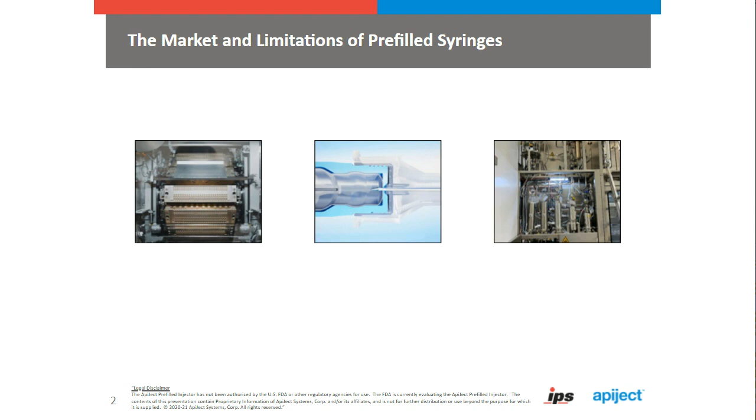So we're going to speak a little bit about the limitations of the prefilled syringe market and a little bit about the current prefilled syringe market. Currently, the prefilled syringe market is used for a wide range of injectable products. It's best known in the industry for higher value products such as biologics or chronic disease drugs that are used with auto-injectors. There are barriers to entering into the prefilled syringe market. It's really around the economics and also understanding the compatibility of components.

When you look at prefilled syringes, the development is costly. You really have to focus on whether or not the siliconization within the PFS actually works with the drug substance and do some compatibility testing. There's also glide force issues and other issues that really partners look at when they go through prefilled syringe manufacturing.

And the supply chain is very complex with having to keep syringes on hand and also having to keep other components available. And then what ends up is a relatively low output for what you're putting into the line. This is why, for us, BFS is so important, really from that unit cost and being able to get into other areas of manufacturing, such as generics or vaccines.

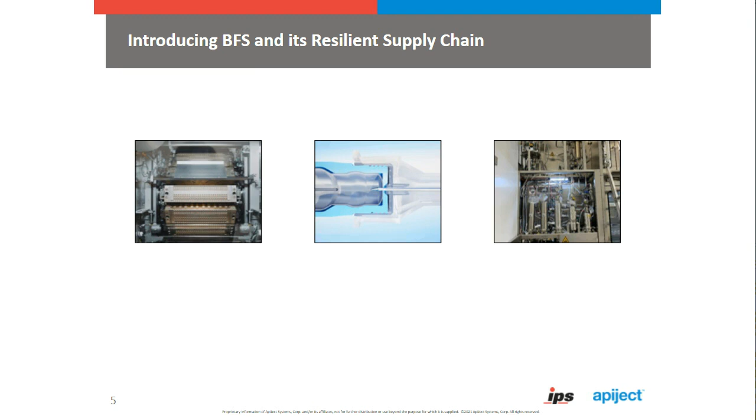So our product offering is really around working with products that don't have the ability to currently enter a unit dose market except for a vial, and really focus on getting BFS PFS out into the marketplace. Ray, would you mind talking a little bit about the supply chain and the resiliency of supply chain for us?

Yeah, absolutely. BFS is an advanced aseptic filling process. That's not made up. That's as indicated under the USP guidelines. And the reasons for that is it's an automated process, it's really a contained process. And so the filling operations happen inside of the machine itself. There's no opportunity for operator interface. It's actually physically impossible for an operator to get into the space.

There is no glass or stoppers, and so there is no opportunity for generation of particulate from those two elements. But the process itself is continuous, and so the containers and the filling and the closing of the entire container closure system happens inside the fill zone in a short 3-second period. The fill zone itself is an ISO 5 environment, so very similar to inside of an isolator in a grade A process.

And then the footprint itself is really small. To give you a perspective, the footprint inside of a normal fill suite for BFS is in the 50 square meter range, and even that's probably generous. There is a gray space on the backside, another 50. So you could put an entire filling module in for roughly 100 square meters, or a little over 1,000 square feet. And the machine itself sits in an ISO 7 background. So it's, again, very efficient.

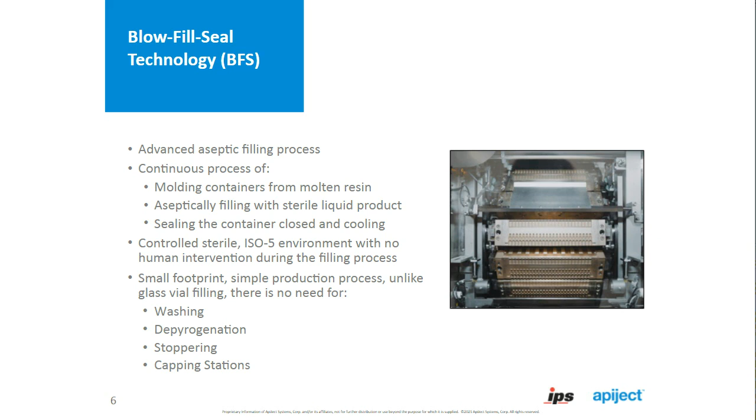So a little bit about BFS and the products that it currently serves within the marketplace. BFS is really known for vaccine manufacturing. Rotavirus in Australia is currently manufactured in the BFS oral ampules. There's also influenza that has been manufactured in BFS ampules. The longest lasting biologic on the marketplace is Pulmozyme. It's been on the market for around 20 to 25 years.

And one of the largest markets for BFS currently is ophthalmic products for the unit dose eye drops that are preservative free, probably best known for Restasis or cyclosporine, which is currently on the market. There's also over 100 parenterals around the world currently in BFS. A lot of them are large volume parenterals, as well as infusions and Luer lock technology.

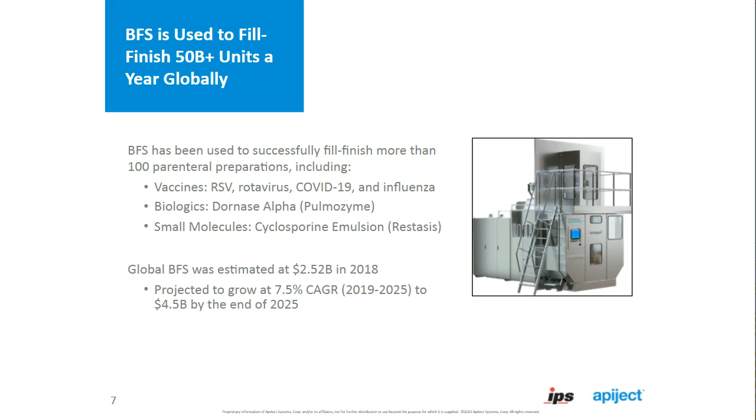What ApiJect provides is adding their platform technology, allowing a container to be able to allow delivery of BFS. Hey, Ray, I'm going to pass it back to you so you can walk through an animation around how BFS actually works, the filling process.

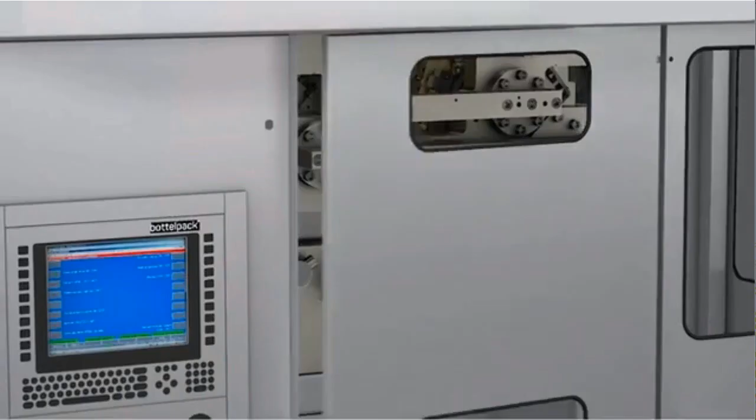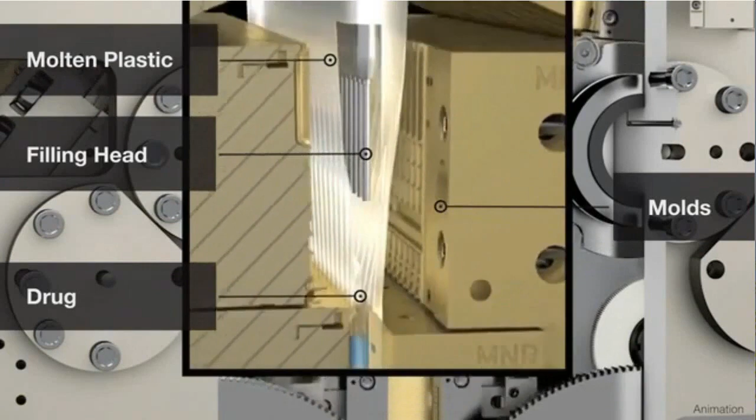Yeah, so this isn't an actual video of the process as it sits in our partner facility down in South Carolina, TRC. They've been an excellent partner. But this is an illustration of how the line works. And so what you see is the molten parison head, which is the molten LDPE, and the filling needles there in the middle depositing the drug substance, and then the molds come together to form the container all in one go.

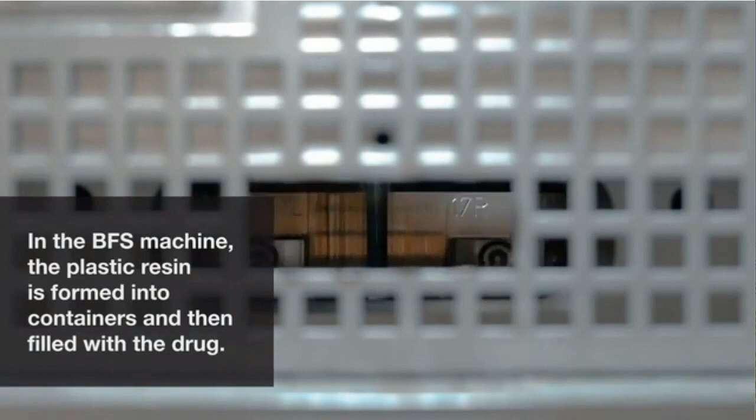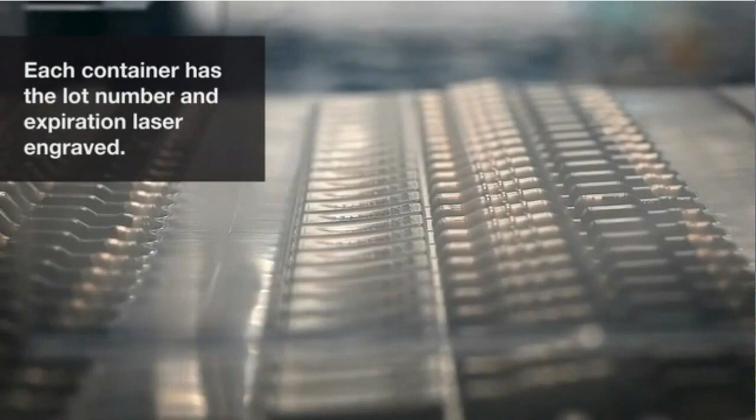So what happens, and what the result is, is a continuous ribbon, which in our case, the mold is set up to produce 25 units in a strip. And so it goes down where lot and expiry is engraved, through a punching station, which then punches it out into strips of 25 where it's ejected from the machine.

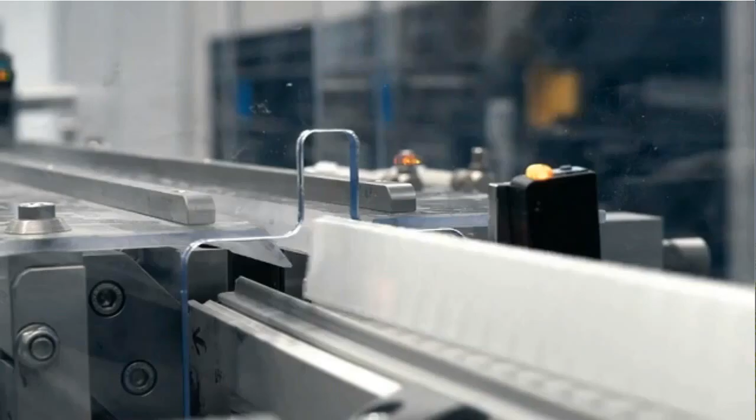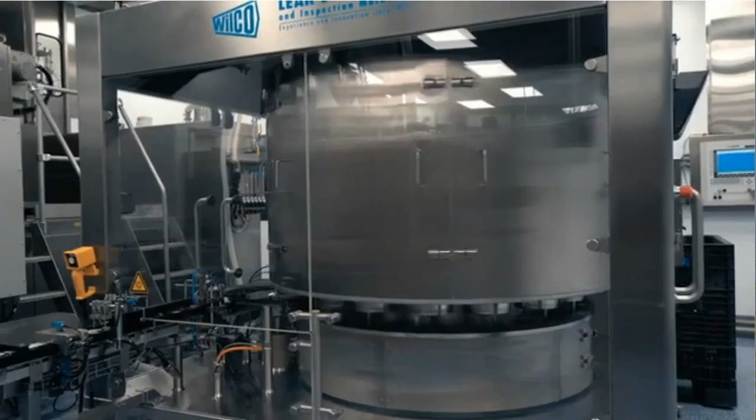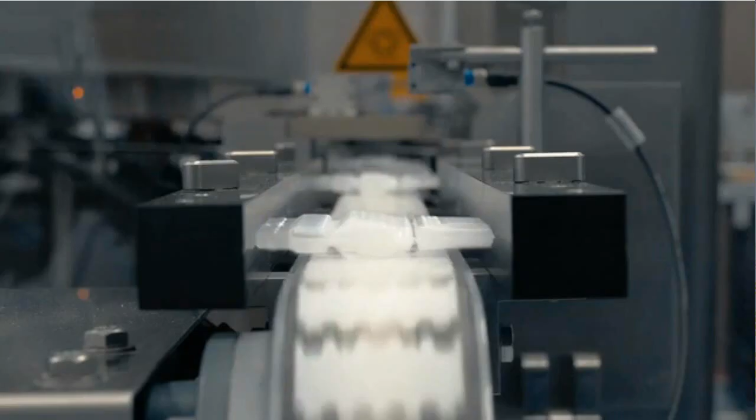It then moves down very closely to the next machine where it's separated into strips of 5, and then onward into the Wilco leak detector where vacuum is applied, and the leak integrity of the cards of 5 are all tested, and really it's that simple. So then they just go down for a final scan on the print quality, and then onward for further processing, which is basically visual inspection and then packaging.

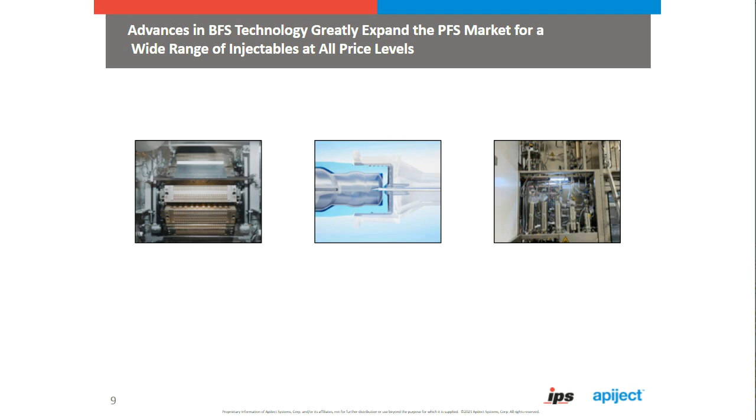And so now I'm going to hand it back to Beth. So I'm just going to walk through a little bit about our current product offering from the ApiJect organization. And it's really about the ApiJect technology platform. And our platform is a BFS container where you add a needle hub and a connector. And when you put them together, it ends up becoming a BFS prefilled syringe.

This right here is something that we're actually working on, and we are continuing to work with pharmaceutical companies for design and processing this product for single use to the marketplace. By using two already known technologies in the marketplace, we're able to join them together and introduce the BFS prefilled syringe into the marketplace. Ray, I'm going to hand it back over to you to talk a little bit about the supply chain.

Yeah, thanks, Beth. So, the supply chain for BFS is actually really pretty simple. It's only two materials primarily. One is the LDPE, which is a low-density polyethylene, which is used to form the containers, polypropylene, which in our case is for the needle hub, and the stainless steel cannula. The needle hub and the cannula come together. So there's really only two points of supply for us that are required.

Now, there are numbers of manufacturers that produce resins and can produce cannula, but overall, the supply chain is very simple. And as anybody who's in the sterile market today understands, pharmaceutical grade glass is in very, very short supply. And so, when you look at BFS as an alternative, it does create a significant advantage when you think about the flexibility and the scalability, right? So, it really can scale up on very short notice. It's excellent for surge capacity.

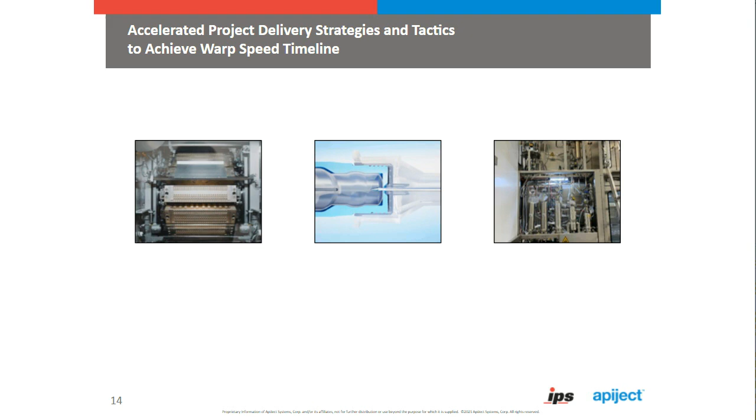We heard before with Ray, BFS technology offers superior sterility assurance. The complete elimination of human intervention from the process and the short duration does in fact provide very good sterility assurance for us. Product quality: as Ray mentioned before, the BFS process eliminates washing, depyrogenation, filling and stoppering, and capping. So not only are we eliminating significant sources of product contamination from glass and stopper-generated particulate, we're also eliminating all the defects associated with the stoppering process and the capping process.

As Ray mentioned also, the equipment footprint and cleanroom classification. BFS is a very compact technology. It's a single machine. It's really very energy efficient compared to what you need to run a conventional line with a washer and a tunnel and a filler and a capper and an isolator. We eliminate the need for WFI generation, for example, for washing of vials, and it has a very limited cleanroom footprint.

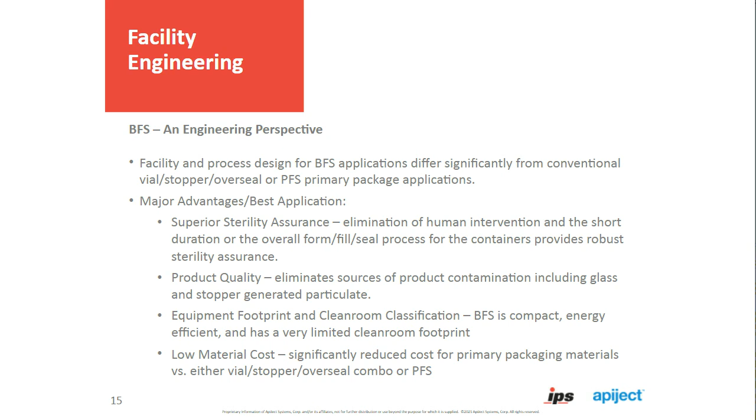If you're familiar with facility design, you realize the myriad engineering and business decisions that go into facility layouts, the personnel, material, and equipment flows, the inventory storage capacity, etc. For blow-fill-seal projects, we see advantages in virtually all of these areas. As Ray mentioned before, we see tremendously reduced supply chain complexity. I think the pandemic has given everyone a new outlook on the need to have robust and simplified supply chains.

We see reduced operational complexity for the facility, and this really extends and touches many areas. This isn't just the relative reduction in complexity of the equipment as we go to the one blow-fill-seal machine versus the 5 or 6 other machines we need on a liquid filling line, but it also results in fewer operating personnel required for the line, less operator training, etc. We see reduced maintenance and calibration costs, which go hand in hand with the reduced equipment requirements.

Improved personnel and material flows. We simply have less material moving into the area, and we have fewer personnel in the area also, which really allows us to optimize the flows for the few things that we do have.

Reduced qualification timelines and costs, and this for me is a huge aspect with respect to project execution. If you take a look at a conventional aseptic liquid filling line and the qualification activities required to qualify and to get to media fills on that line, there's a tremendous amount of work to do. The blow-fill-seal system, on the other hand, eliminates many of those qualification activities up front. I won't say all of them, but certainly it's greatly reduced, which allows you to get to a media fill and to stability batches faster than you could on a liquid filling line.

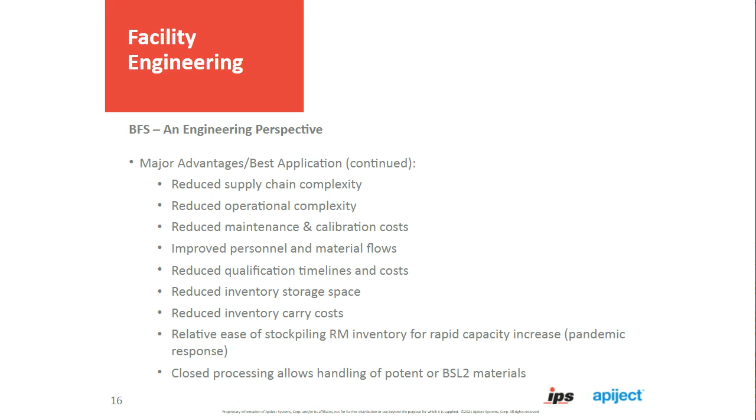Finally, for the design considerations, it is important to understand some of the key differences we see between blow-fill-seal and vial or prefilled syringe facilities. As Ray mentioned, the formulation batch sizes can be quite different. The blow-fill-seal process really wants to be an extended operation process. Once you get it up and running, it's very efficient. So if we're able to extend manufacturing on a campaign basis, say for 100 hours at a stretch, it really helps to reduce the cost of goods sold. This can in turn increase the formulation batch sizes required.

We have CIP, SIP requirements for blow-fill-seal equipment. Again, as Ray mentioned before, there is a requirement to 100% integrity test filled containers. However, there are good solutions readily available for that.

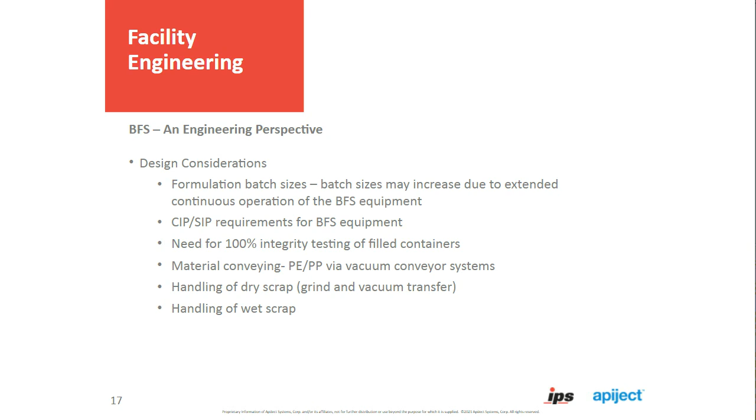And then finally, some of the material conveying requirements differ markedly here. The polyethylene or polypropylene resin is often conveyed in by vacuum conveyor systems, which allows us to locate the supply for those materials at a location that's convenient for warehousing purposes. It doesn't have to be directly adjacent to the blow-fill-seal machine. And also the handling of dry scrap material and wet scrap material differ a bit from your conventional processes. I'm going to turn it back over to you now, Beth.